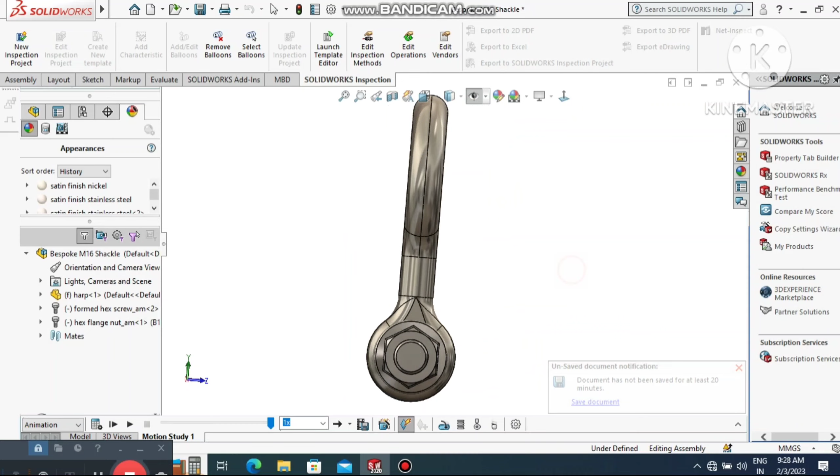So guys, today we are going to create a shackle design in SolidWorks. Let's see how we create the M16 shackle in SolidWorks. I hope you will enjoy this tutorial. Look how we create this part, and later we assemble this part in SolidWorks.

Now here we can zoom out this shackle. Look how we create this part in SolidWorks. In this video we will learn how to use revolve features, dome features, revolve cut and many more. So here we just create this part. Go to the file, select new, and here we select part.

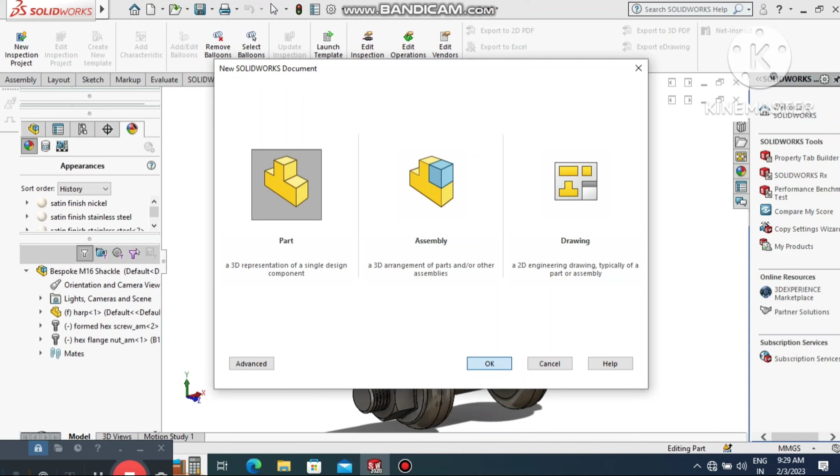Now here we change the background to plain white, and here we select the front plane, right click, sketch, and here we create two circles. Go to the center point and create two circles here.

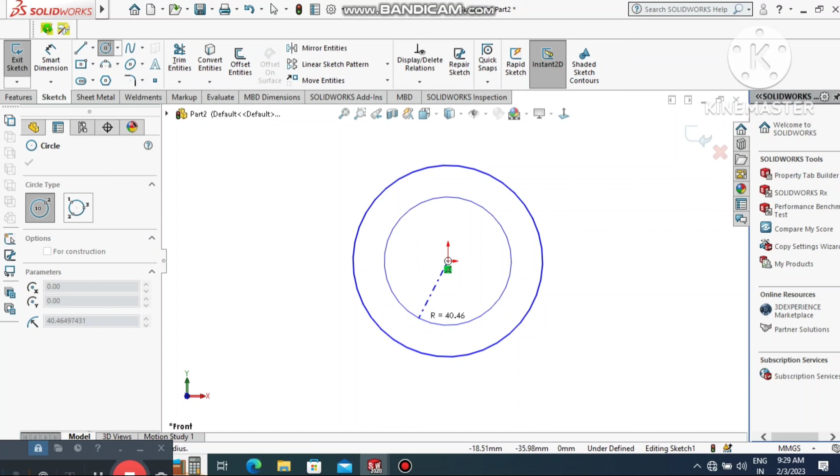Now go to the smart dimension and select this circle and make it 82 diameter, and select the second circle and make it 50 diameter.

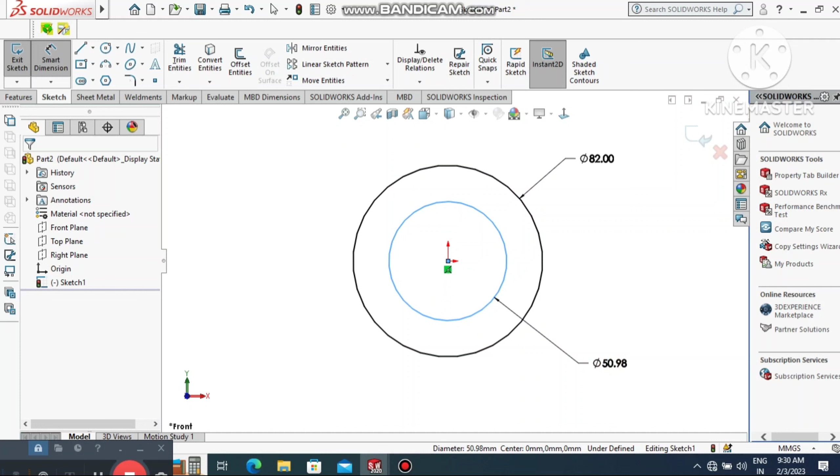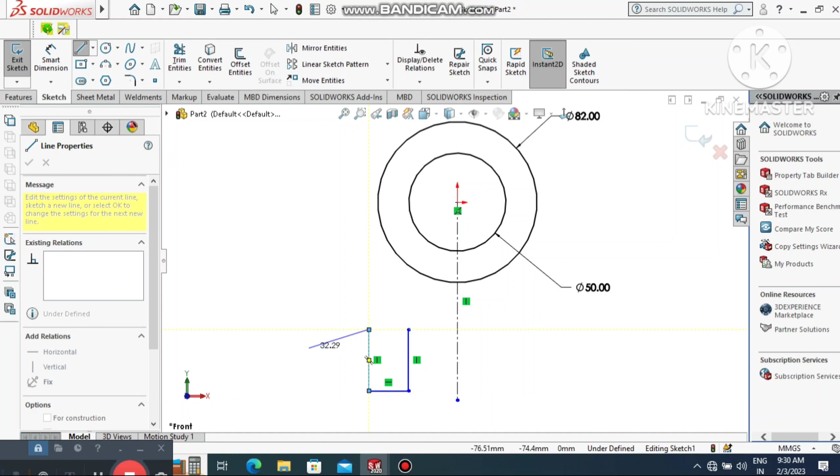Now here we create a center line from this origin point. Make sure it is vertical to this center point. Again we go to the line and here we just create one line. Now select this one and create it up to here.

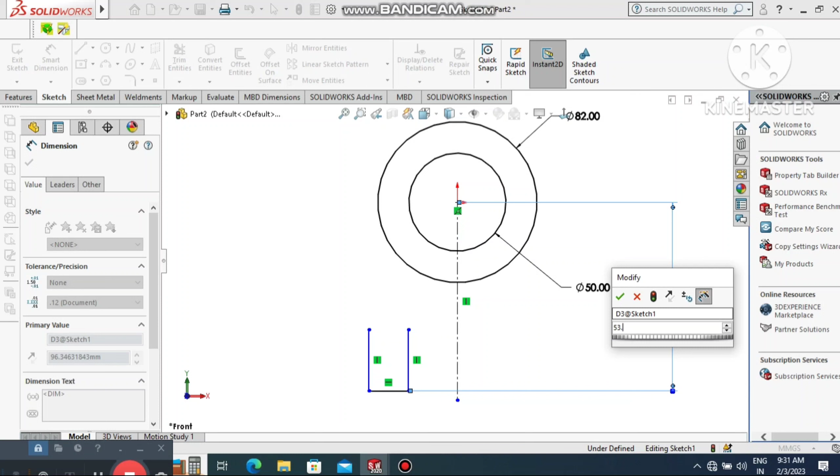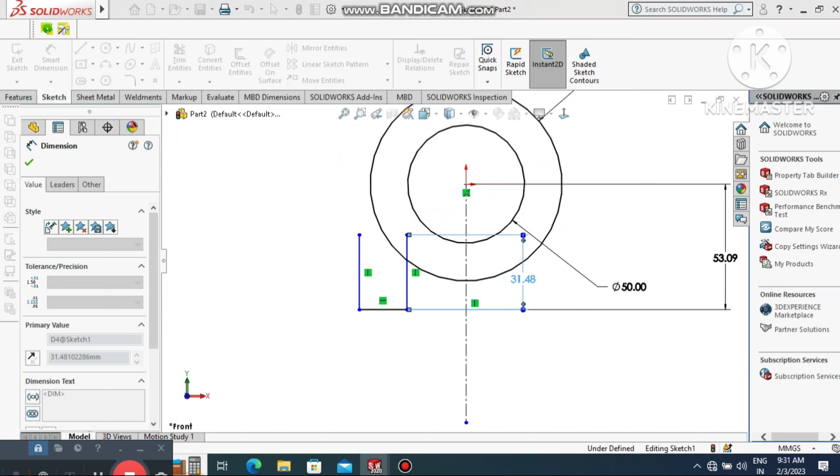Now go to the smart dimension and we select this center point of this line and this line, and here we make the gap between both lines 53.09 mm. Now again go to the smart dimension and here we select this line and make this line 19.03 mm. Now again select this one and make it also 19.03 mm.

Now here we define this line, the bottom line. Again go to the smart dimension, select this line and make it a 16 mm gap. Now again we make this gap between this center line and this line. So here we keep the gap at 13.70 mm. Now here we just select and create this line.

Now here it's time to create an arc. We are better to select 3-point arc to create this one. First we create a center line up to here. Now here we select 3-point arc and select this point and select this circle and make the arc up to here. Select.

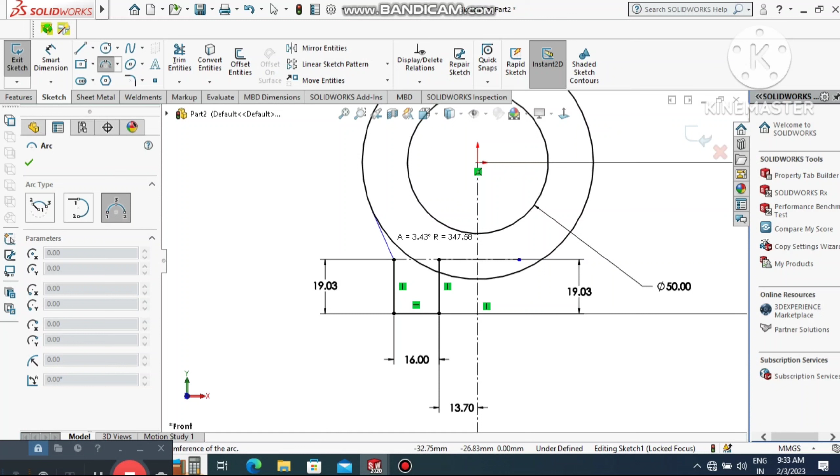Now again go to the 3-point arc and just undo this. Again select 3-point arc and select this point and this circle, and here we create. So select it and make it just inside, so the arc will be created.

Now again select center line, and here we just create a center line for the arc point, coincident relation. First we create the center line, so go to the center line and select this and create one center line up to here. Now go to the smart dimension, select this origin point, make it collinear. Now go to the smart dimension and select this line and make it 34.60 mm.

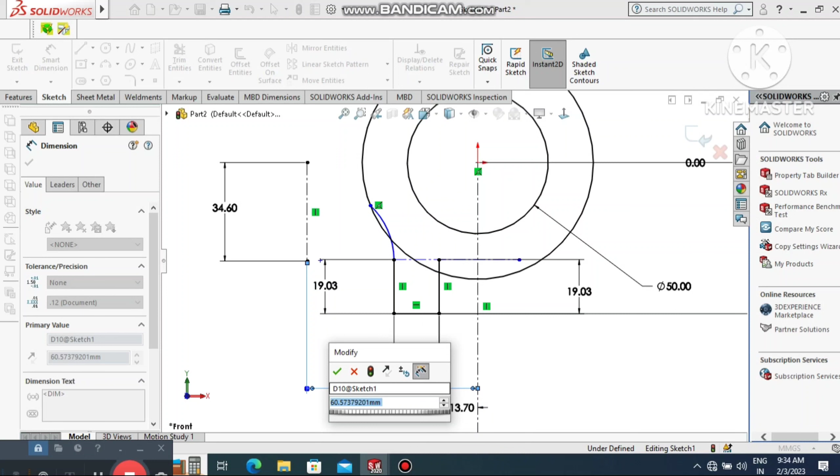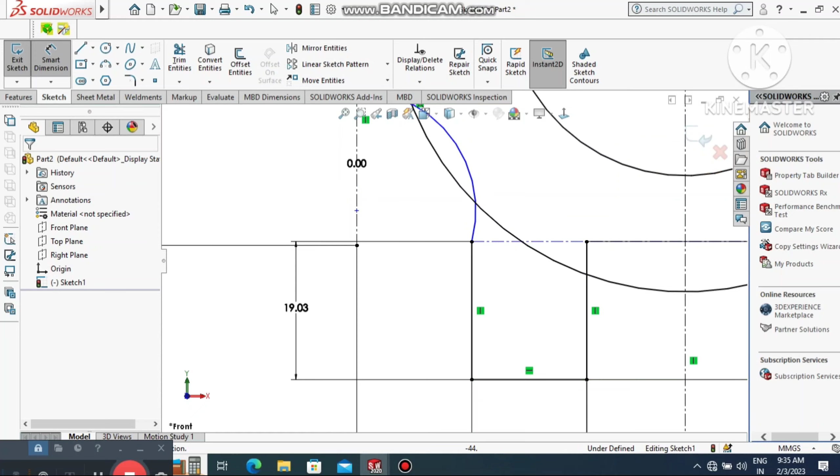Now select this center line and this line, and here we give the gap between both lines - make the line distance 45.70 mm. Now here we select the arc point and this point and make it merge or coincident at this point. Now go to the smart dimension and make the radius 16, so make it 16.

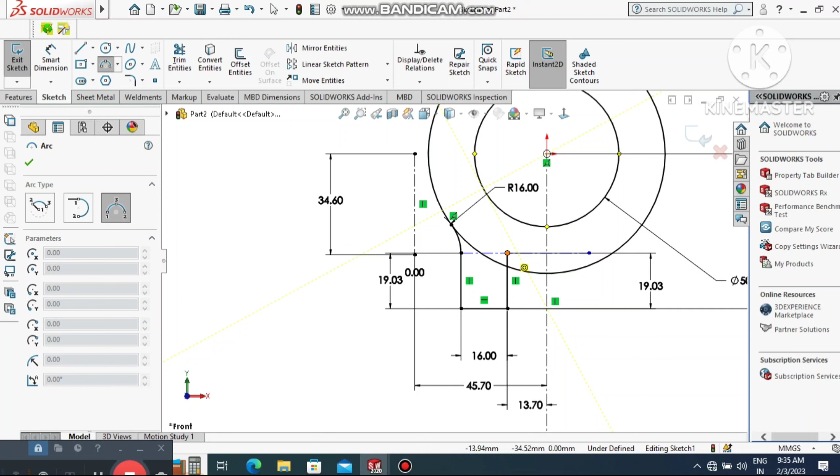So again we create one more arc. Go to the 3-point arc, select this point and this circle point and create one more arc. So we just select this one and select this point, and now here we just make it inside, so select here and make it up to here.

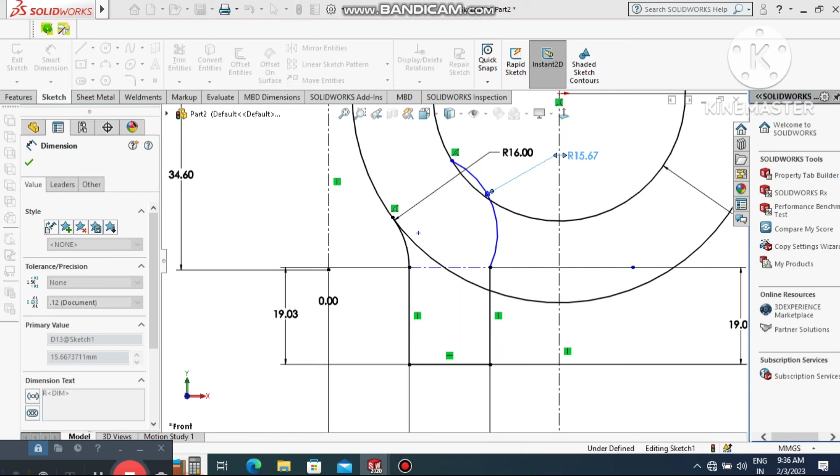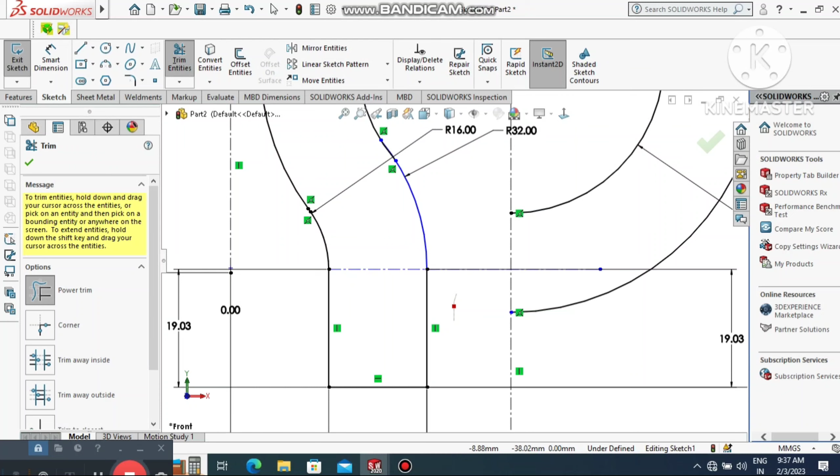Now here we select this one and make it 32 radius, so make it 32. Now here we trim this circular part, so again we make the mirror to this. First we trim this part, so just trim it and remove this part. Here we just created the arc, so there is no need for extra part, so select and trim. Go to the trim command and here we select power trim and trim this one.

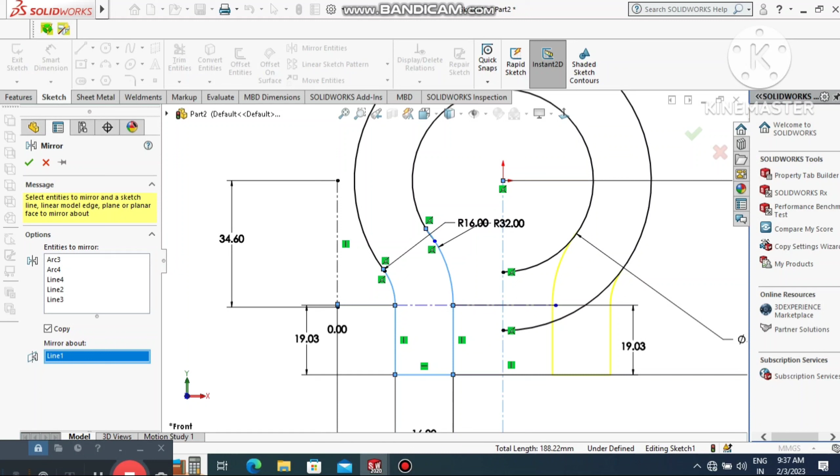Now here we just mirror this sketch, so go to the mirror command, now select this arc and this line also and make the mirror about this center line, so here we create it. Now here we just trim this part sketch, so go to trim and sketch this one, trim this sketch. Now here we create the sketch.

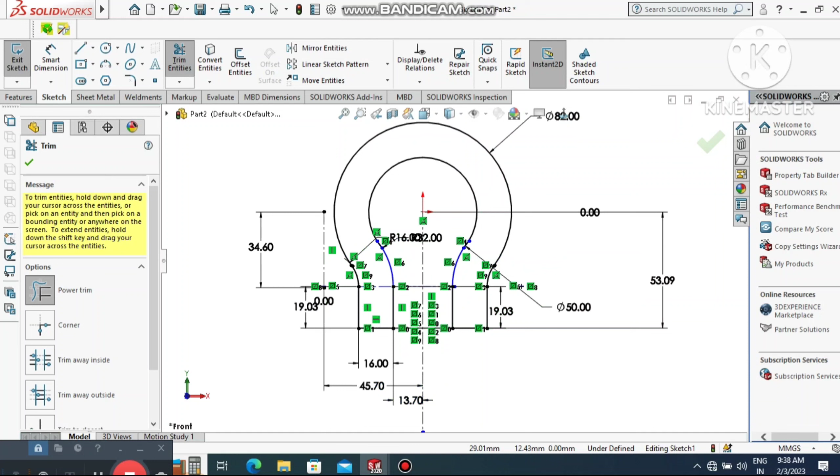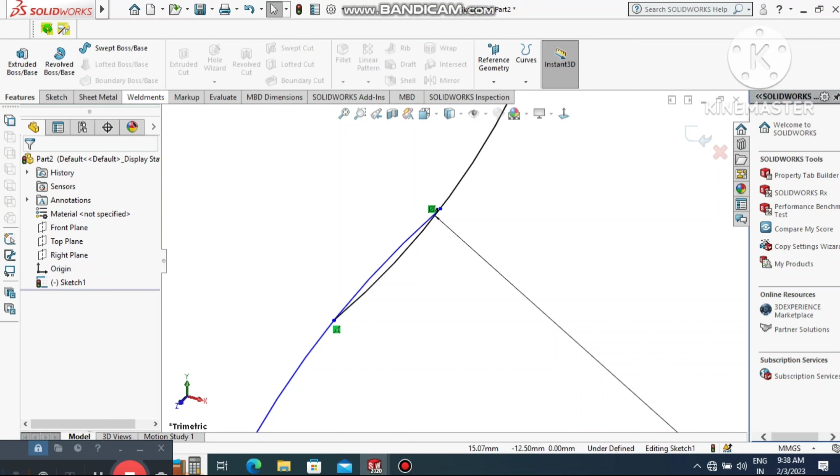Now here we make the extrude of this sketch, so go to features, select extruded boss base. Now here we forgot to trim this sketch, so again go to the sketch, now select trim, and here we trim this extra sketch which is disturbing the boss extrude.

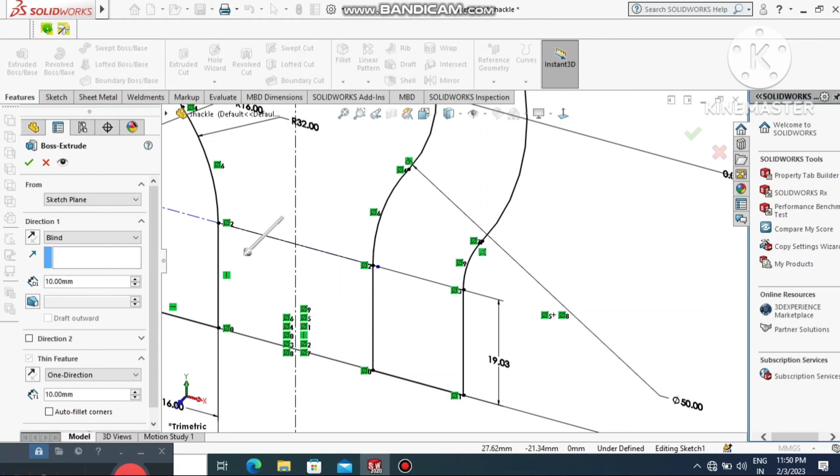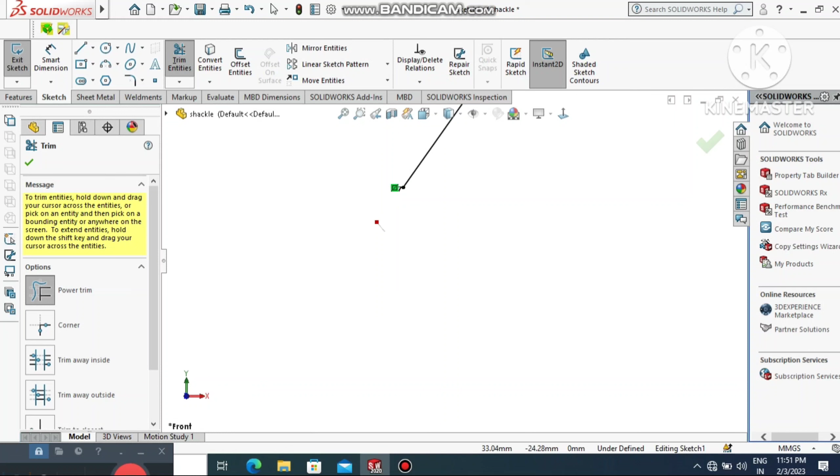Now here we check, and here we keep the relation. Now here we just trim this extra part sketch. So select. Now again this one, and make the relation coincident - sorry, not coincident, we make the relation tangent.

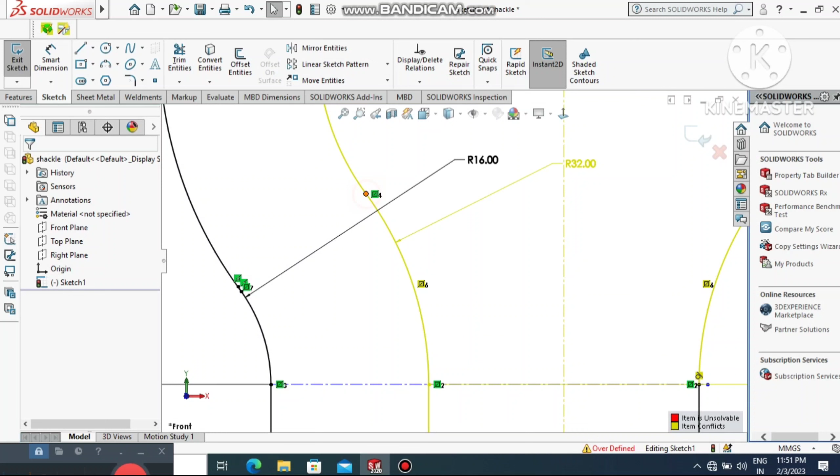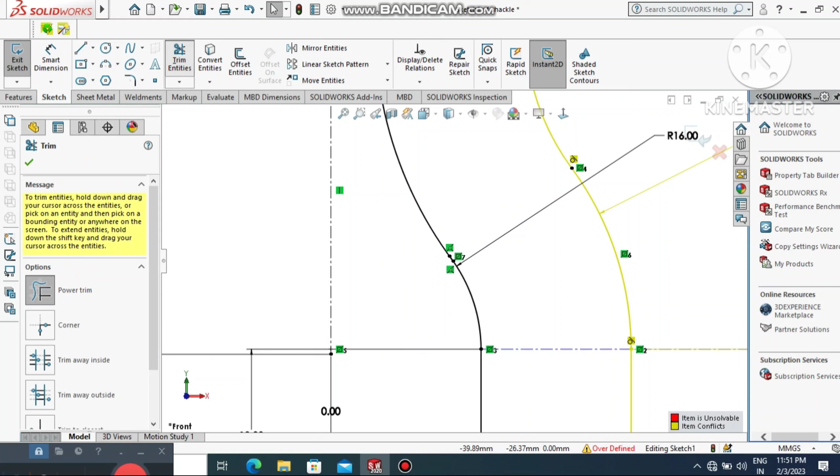Now here we select and make the relation tangent. Select this one and make it also a tangent relation. Now here go to the trim and trim it also.

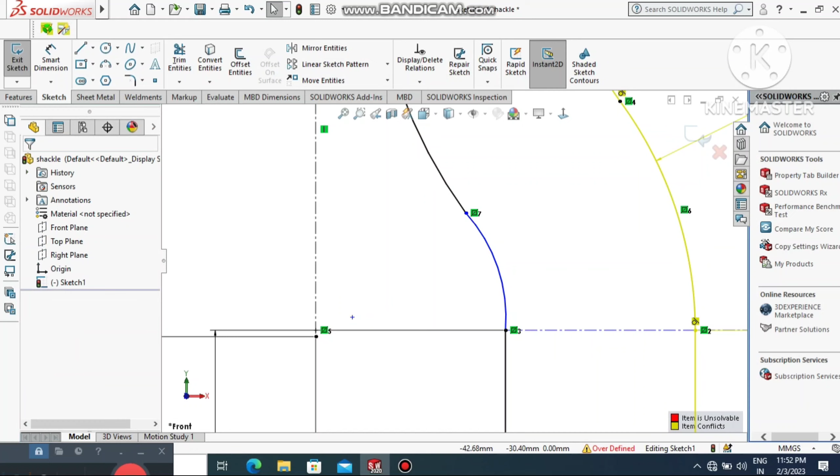So again here we create an arc. Go to the 3-point arc, select it, and now we create an arc from this point to this point and just make it inside this arc. Now here we also create the arc. Go to the 3-point arc, select this point and this point. Now we make the arc inside.

Now here it's time to make the dimension. Go to the smart dimension, select this arc and make this arc 16 radius. So make it 16 radius.

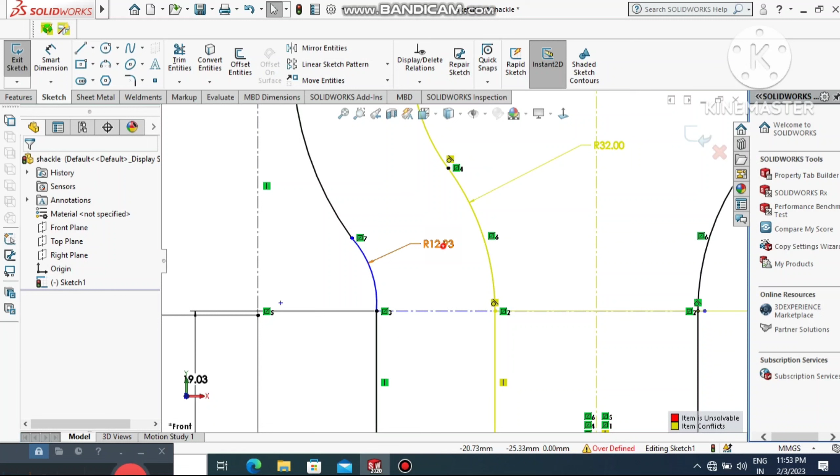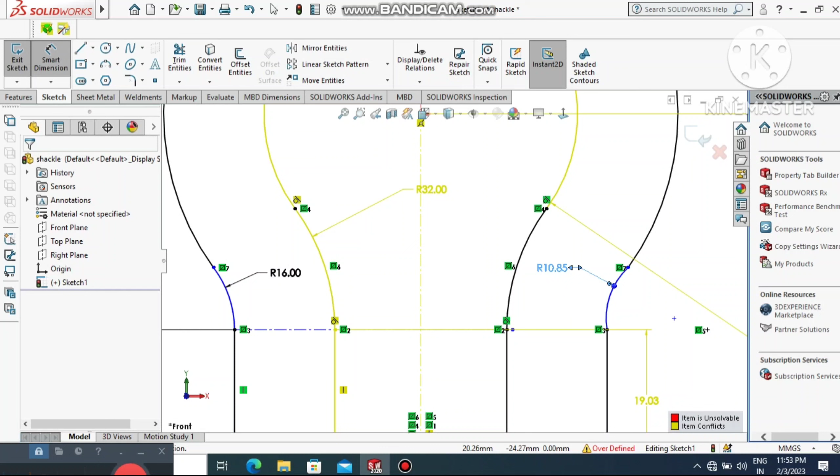Select and make it 16 radius. Okay, now again we select this arc and make it also 16 radius.

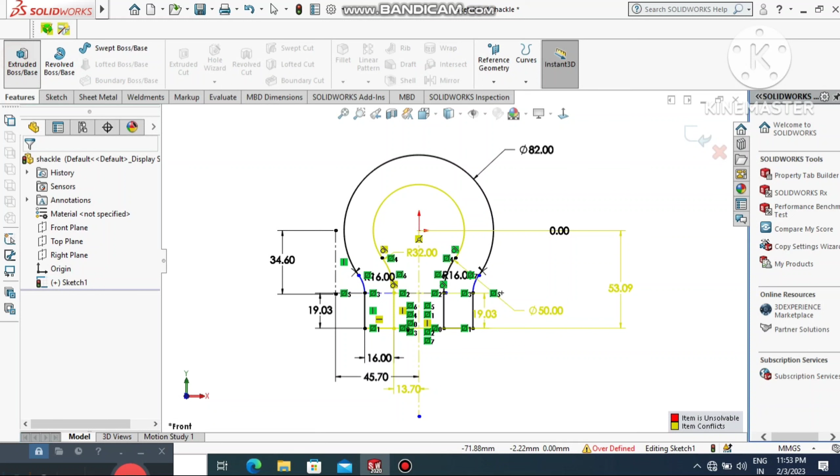Now it's time to extrude this sketch. Go to the features, select extruded boss base, and make the extrude 16 mm from the mid plane. So make it 16, and select the condition mid plane.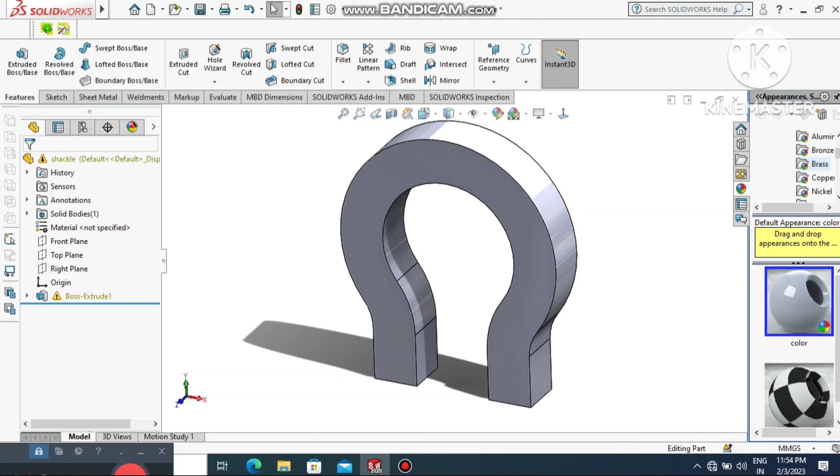Okay, now here we make the fillet to all this side, 8 mm fillet. So first we apply the material. Go to the design library, select material, and here we select nickel, and here we select brushed nickel, so it looks better.

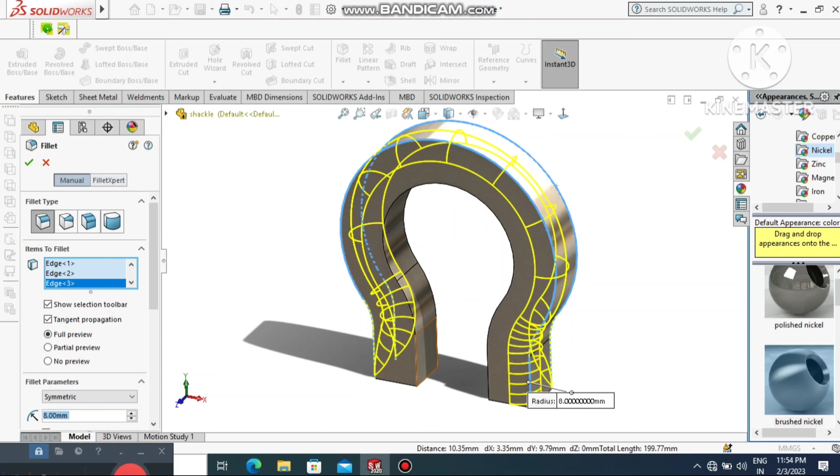Okay, now go to the fillet, select this edge, and here we keep the fillet 8 mm. Select this one and this one. Okay, so here we keep the fillet 8 mm all this side.

Now here we select the front plane, right click, sketch normal, and here we create center line. So first we create the center line up to here. Now we select this line and create up to here. Okay, and just join this line.

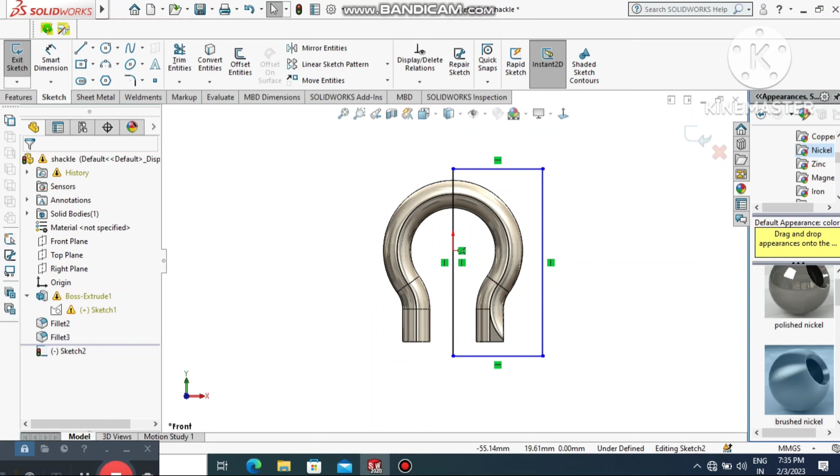Here we extruded cut this part, so here we delete this part and create further design, and later we make the mirror of this body. So first we delete this, trim this part.

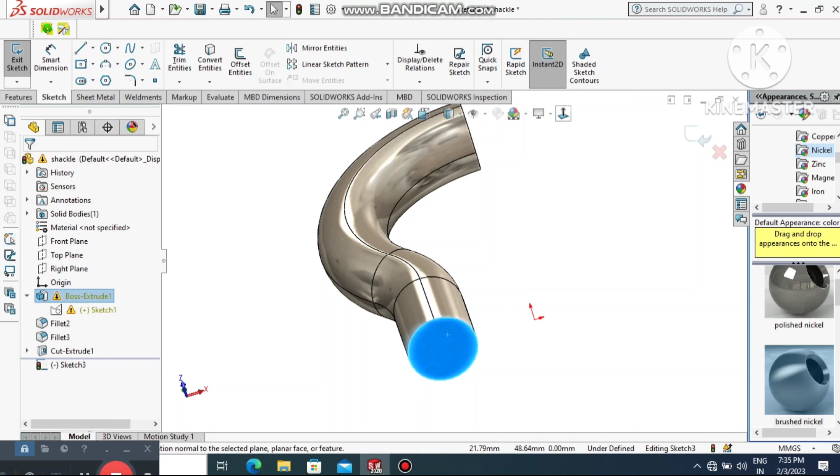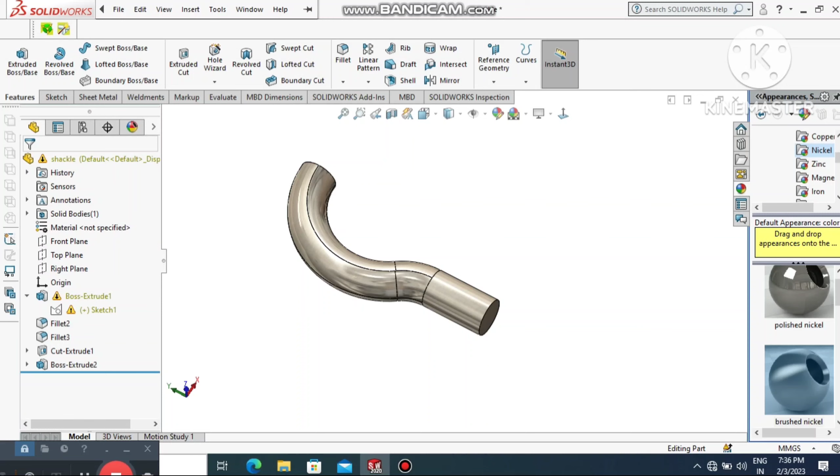Okay, now here we select this face, right click, sketch normal, and here we make it convert entities. So go to the convert entities, now select this face. Okay, now it's time to extrude this sketch. Go to the extruded boss base, and here we make the extrude 8 only, and make the merge result. So here we create one single body, so it's better to make the parameter merge result.

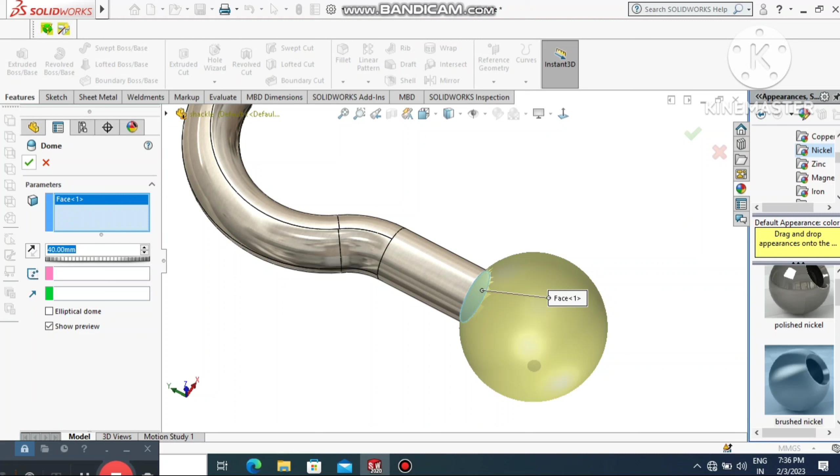Okay, now here it's time to create the dome feature. Go to insert and select dome feature. Now here we select this face, so we need to make the dome of 40. Okay, now here we create dome feature.

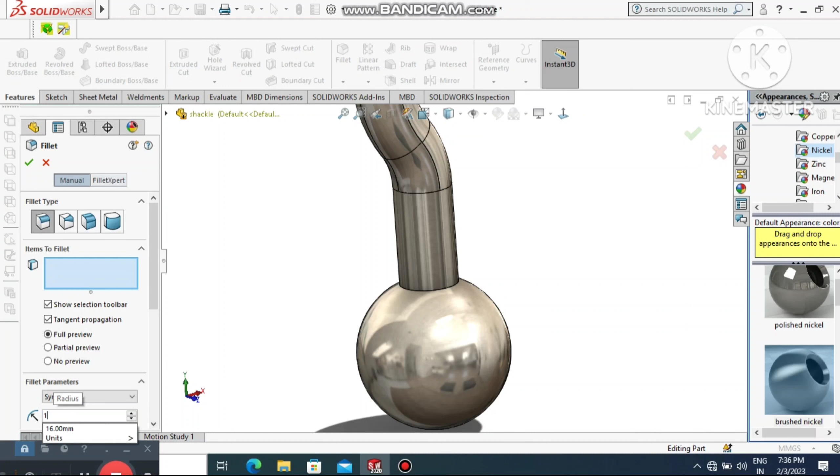Now here we make the fillet to this edge. Go to the fillet command, and here we make the fillet of 8. So make it fillet, sorry, not 8, we create fillet 16. Okay.

Now again we create cut out some portion. Select this front plane, right click, sketch normal, and here first we create center line. Go to the center line and create center line up to here. Okay, now again we select the line. Go to the line, and here we create line from this point. So here we just create one line here. Now again select this line and create line from here.

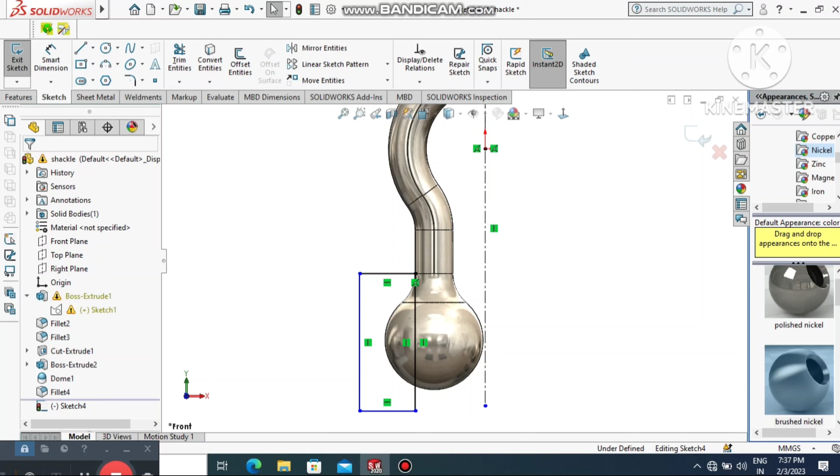Here we just need to remove, cut out some portion for bolting. So here we just create a sketch. Again we select this line and create the line from this point, up to here. Now select this one, and just join this part.

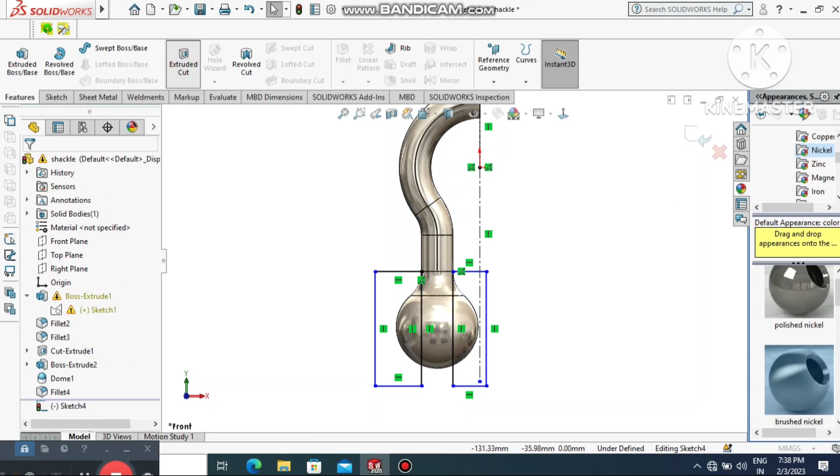Okay, now here we cut this sketch throughout this body. Go to the extruded cut, and here we cut this portion. So we select and make the direction through all, both sides. Okay, so here, look, we cut this part body.

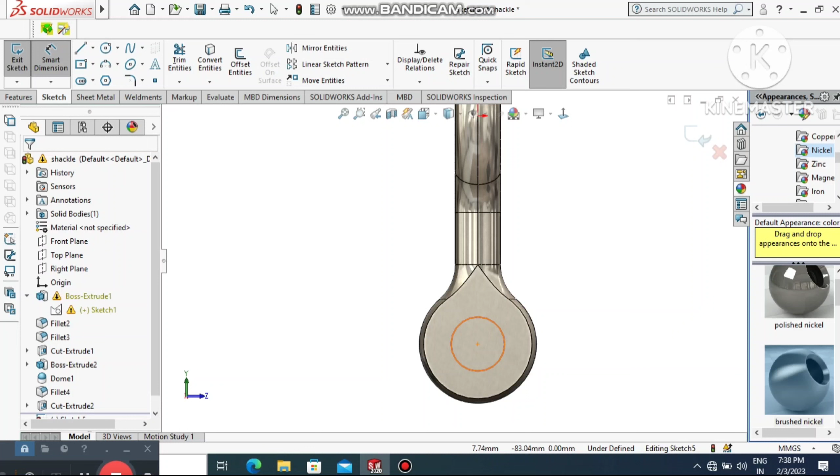Now again select this face, right click, sketch normal, and here it's time to create the circle cutout. So here we just find the center line. Go to the circle, select this point and create the circle up to here. Now select this circle and make it 16.3 diameter.

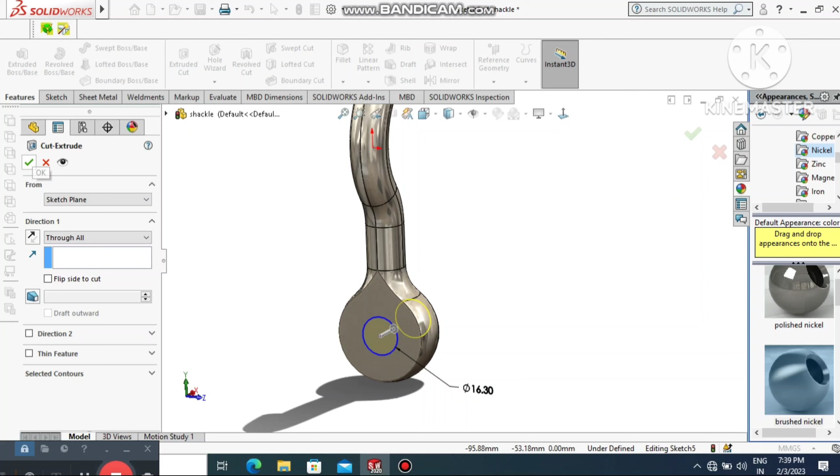Okay, now here we just cut this circular cutout. Go to the feature, select extruded cut and make the direction through all. Okay, now here we cut this part.

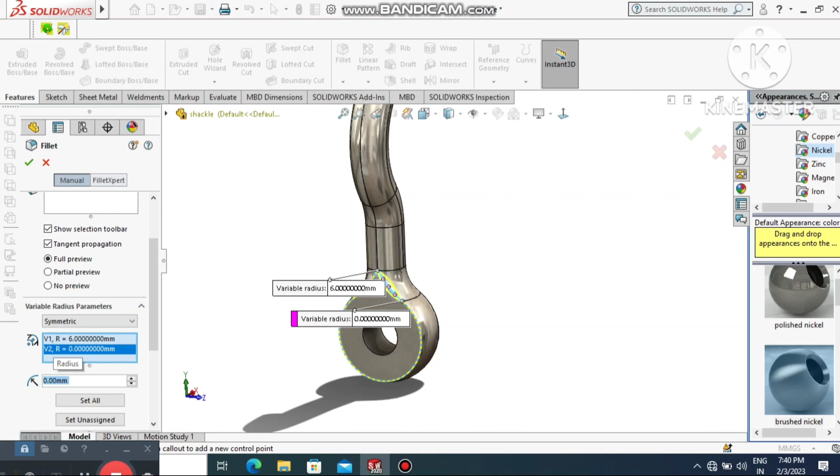Now here we just add the fillet. Go to the fillet, select this edge. So here we better create a variable fillet. Select this edge and we create V1, make it 6, and V2 create 0, so make the V2 radius 0.

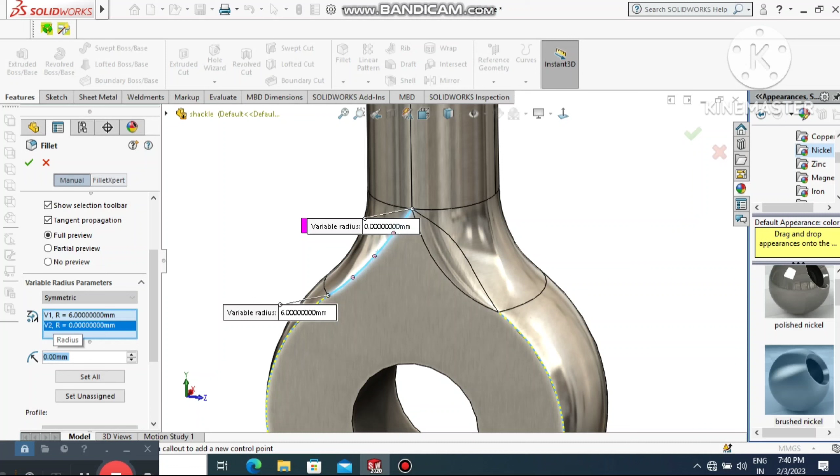So again we just make the fillet to this. Go to the fillet and select this edge, and here we make the fillet, create up to here, 6. So it will not work, so it's better to create a normal fillet. Again go to the fillet, select this edge, and here we make the fillet of 4 radius.

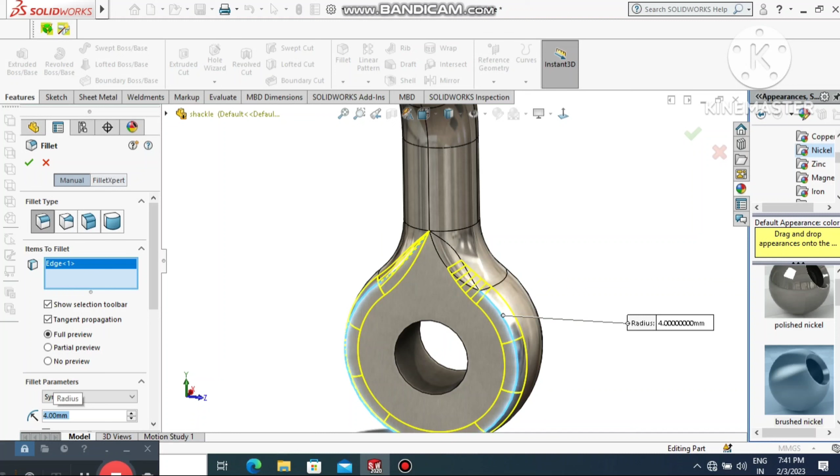Now here we just add the fillet to the other side. So again go to the fillet, and first we make the fillet of 2 mm inside this circle.

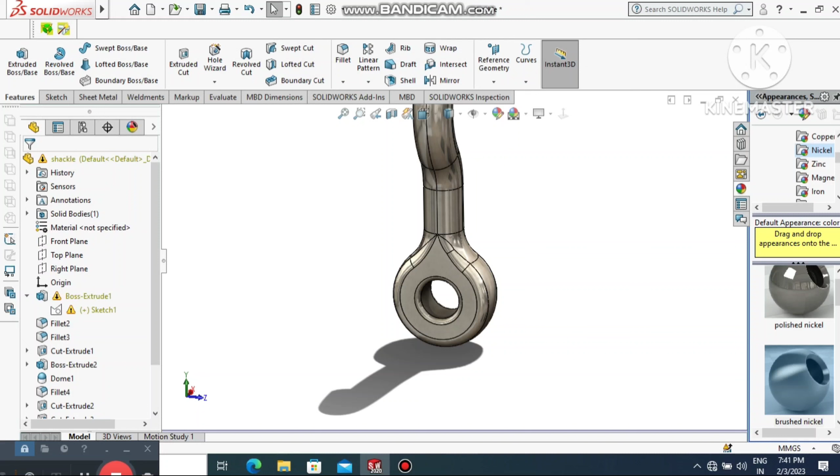Okay, now again rotate this model, and here we just apply the fillet. Go to the fillet command and select this edge, and here we create fillet 6.

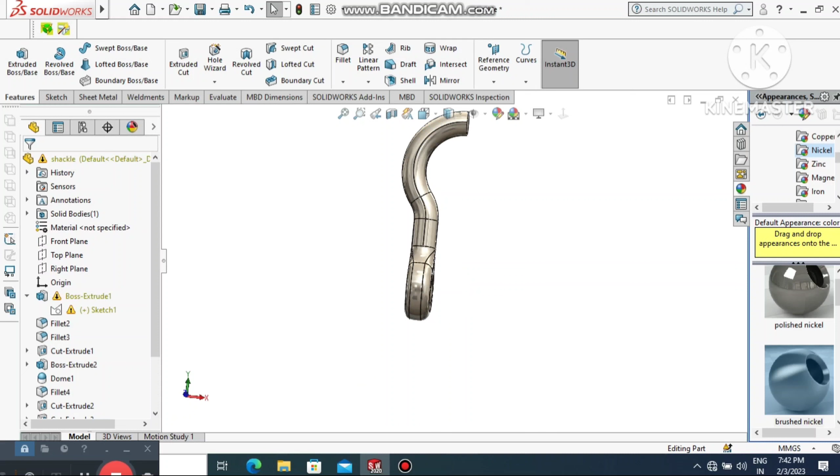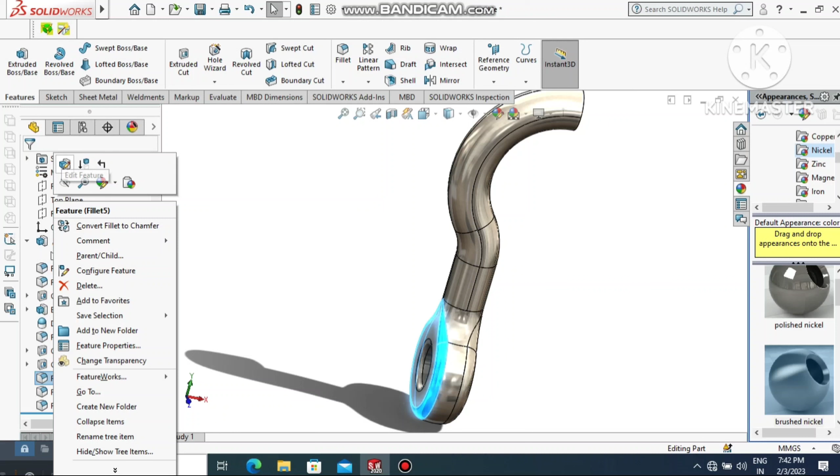So 6 mm is not required, so here we change into 4 mm. Again go to the edit feature, now we select this fillet and make it edit, so just check. So here we apply the 4 mm radius fillet, so we make the fillet 4 mm this side also.

Now again select this face, right click, sketch, and make it normal, and here we create convert entity. Select and select convert entity, so the sketch will be converted into a sketch. Now go to the boss extrude and make this extrude 7 mm only.

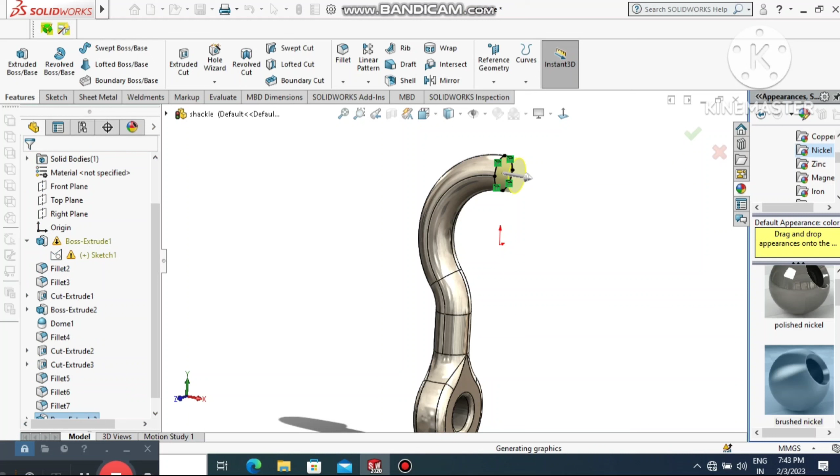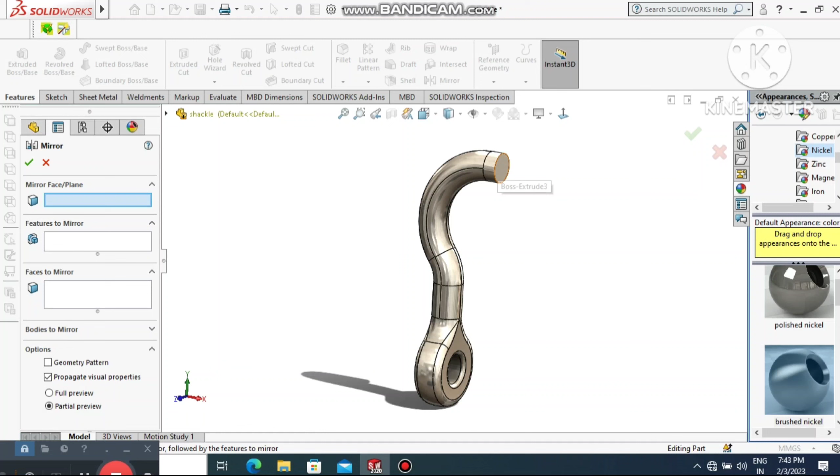Now it's time to make the mirror body. We create and check the merge result. So here we make the mirror body. Go to the mirror, and here we select mirror face plane. We just select this face where we keep the mirror. Select this one, and here we select body to mirror. Simply select this body. So here look how we mirror this part.

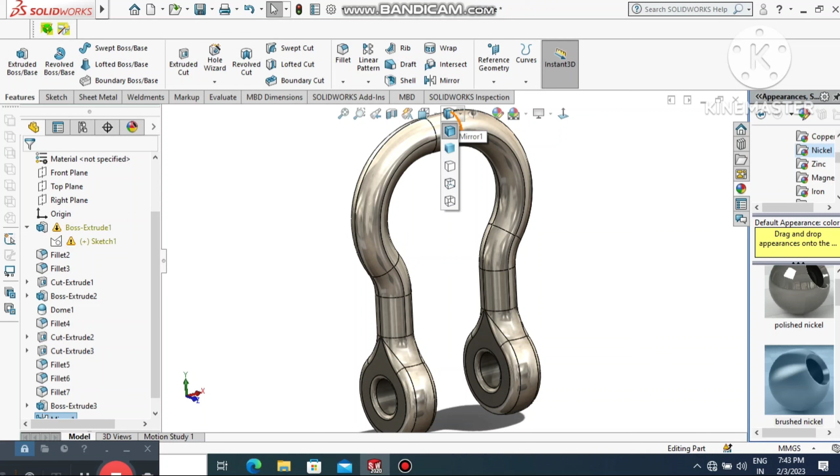So look how we create this 3D shackle in SolidWorks.

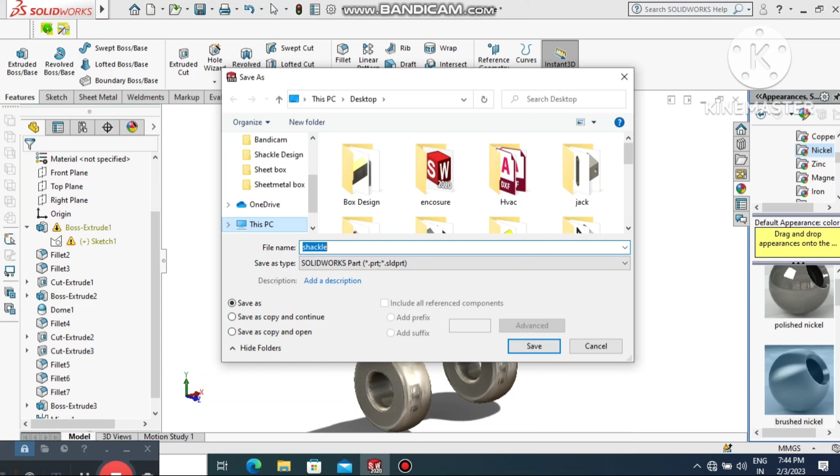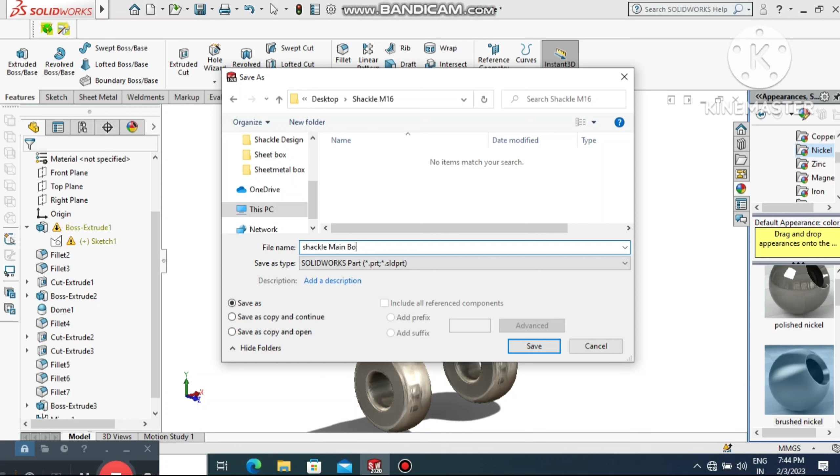So here we create this part, and now we just select and save it to our destination. Go to the file, now save it and give the destination to your folder. Select new folder, and here name it Shackle M16. Now select this one and save it as shackle, shackle main body. Here we create and save it to our destination.

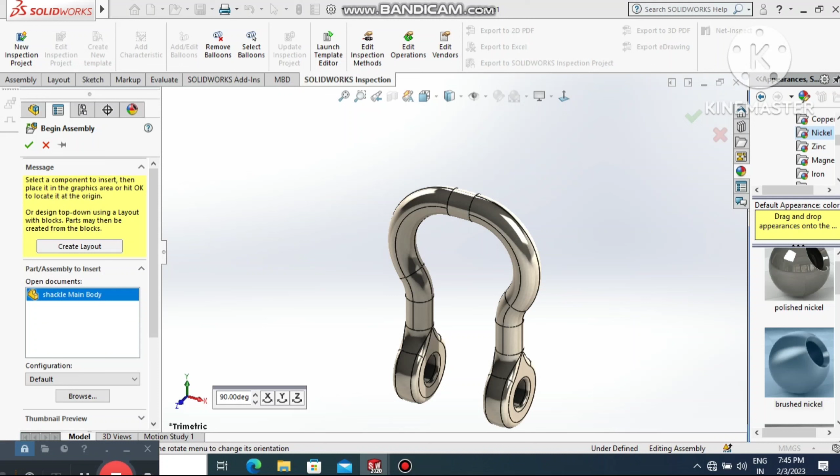Now here it's time to apply the nut and bolt to this body. Go to the assembly, select OK. Now we just import this body, so just insert. Now drag up to here and make the background plain white.

Now here we just see the view, now pan it here. Okay, now again go to the design library. Now select add in now. Here we just drag and select ANSI metric.

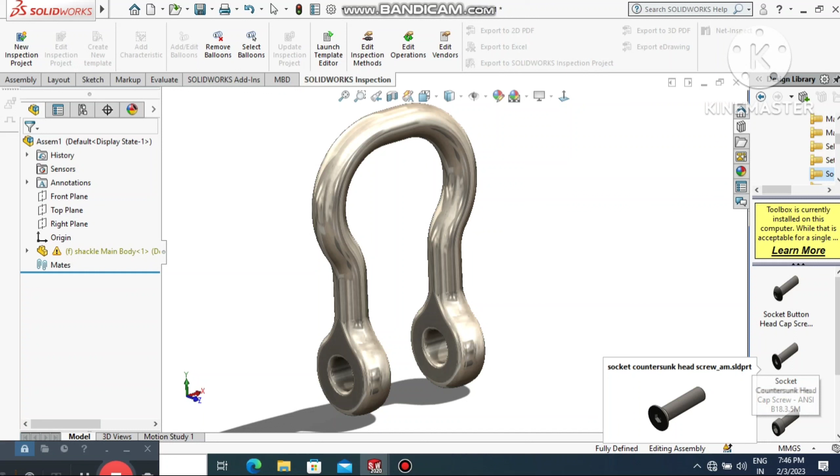Now here we select this bolt, so here we go to the socket head bolt. Not socket, we just remove this one. Now here we need hex head bolt, so select and simply select this bolt and drag up to here. It will select the dimension, so here the size will be M16.

Now here we give the length, so go to the length and make the length 90 mm. Since 110 mm is too long, make it 90.

Now here it will ask for thread design, so we will select simplified. Not simplified, we need schematic, so it will show the thread automatically. Now here we remove this one.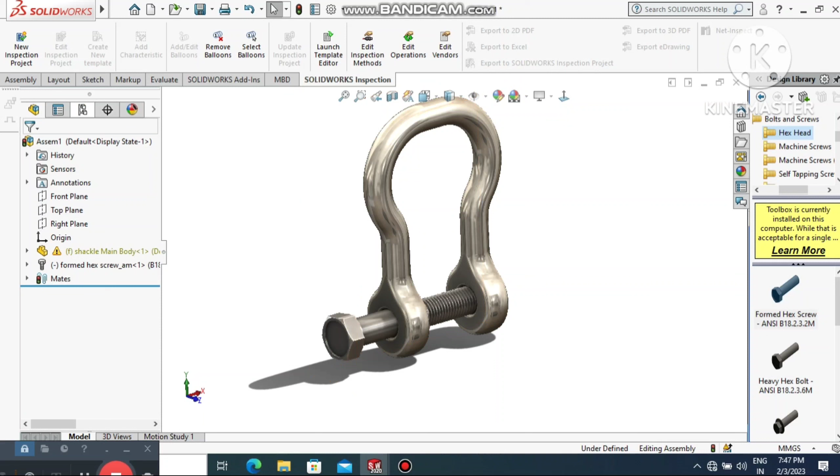Now again we make the relation mate position, so we just select this bolt, right click, select this one and this one, so here we make the relation coincident.

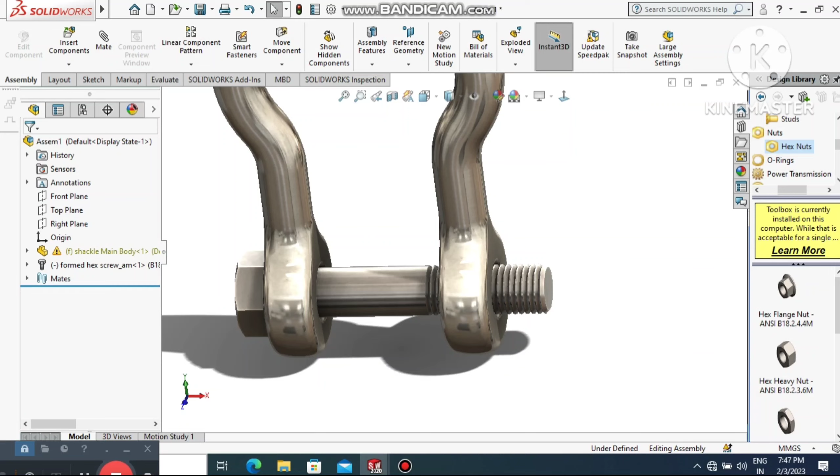Now again we apply the nut, so again go to the design library. Now go back this side and here we select nut and select hex nut. Now simply select this nut and drag up to here.

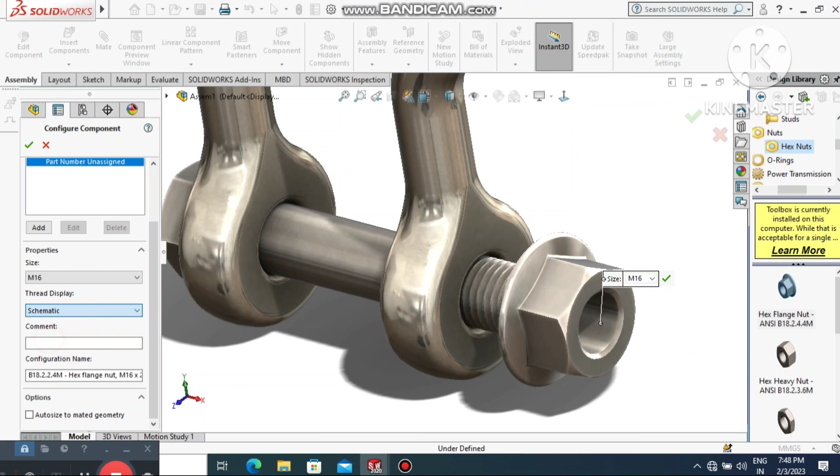Now here we select and make the thread schematic, so the thread will be created automatically. So it's better to look how we show this threaded view of this nut and bolt.

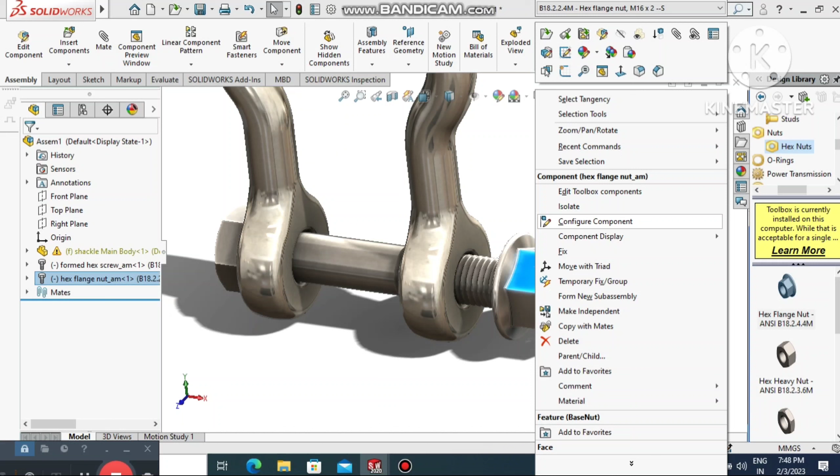Here we select this nut, right click and see the view mate, select it and here we delete this coincident mate, so just select and delete it. Now exit this, so untick this.

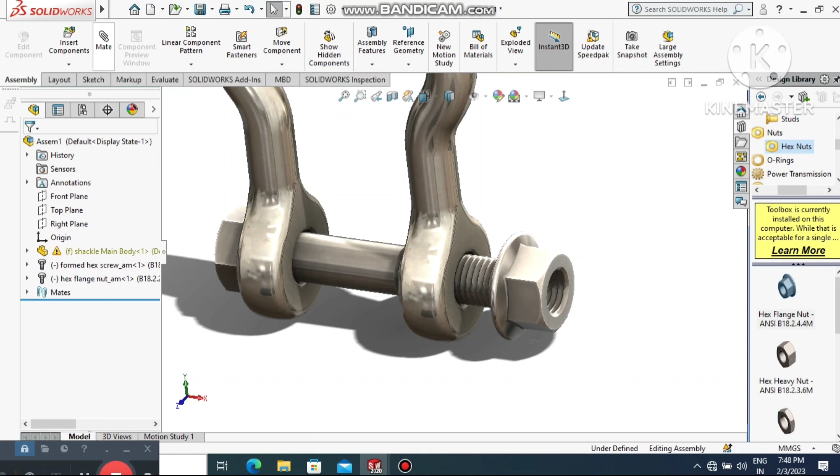So here we just mate, so it comes inside, so here we go to the mate, select this face and this face, so it comes to this position.

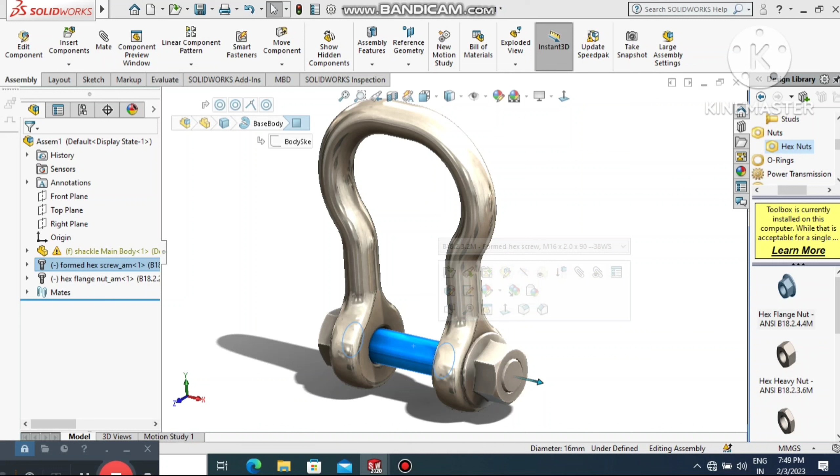Here we adjust and increase the length of this bolt, so it's better to double click on this bolt. Now exit this mate first, then double click on this bolt and here it will show the arrow, so here we can increase or decrease length. We just make it 110, sorry, not 100 mm length.

So here look how we create the shackle and make the assembly of this shackle, nut and bolt. So look at this one, now here we just create and zoom out, so look how we design in SolidWorks.

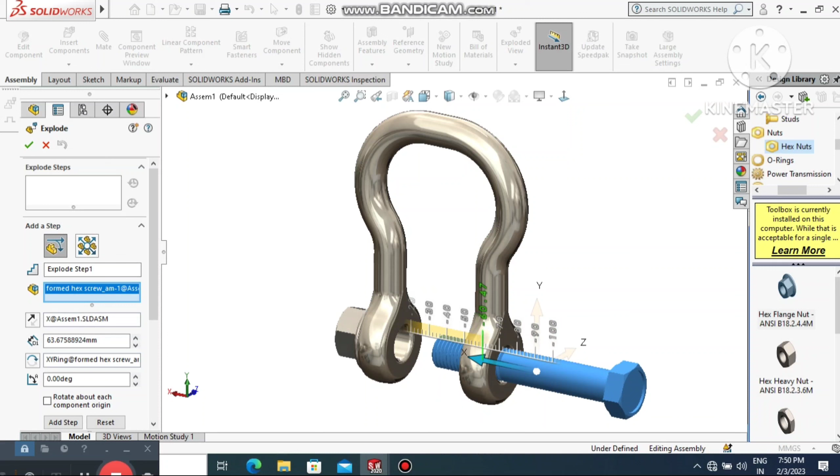So here we create exploded view, so select this bolt and just drag. Again go to the exploded view, select this bolt and drag outside. Now here we select the done feature.

Now you can select this dot and just drag to the opposite side. And here we just make the exploded view line, so here it will show you how any part assembles and in which direction. Select this route line, now select this line, so here it will show how any assembly joints, how we fit any assembly parts.

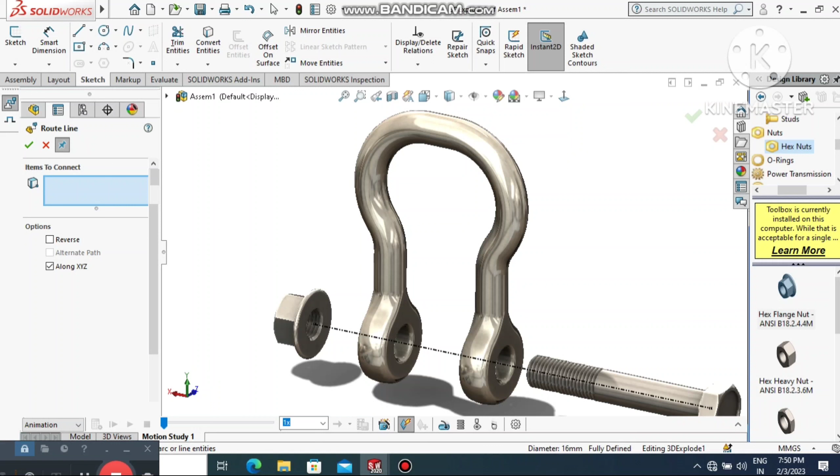So okay, now here we create the animation. Go to the animation, now here we select rotate, and again we select this animation wizard and select the explode, and here we explode from start time of 10 and make the duration 8 seconds.

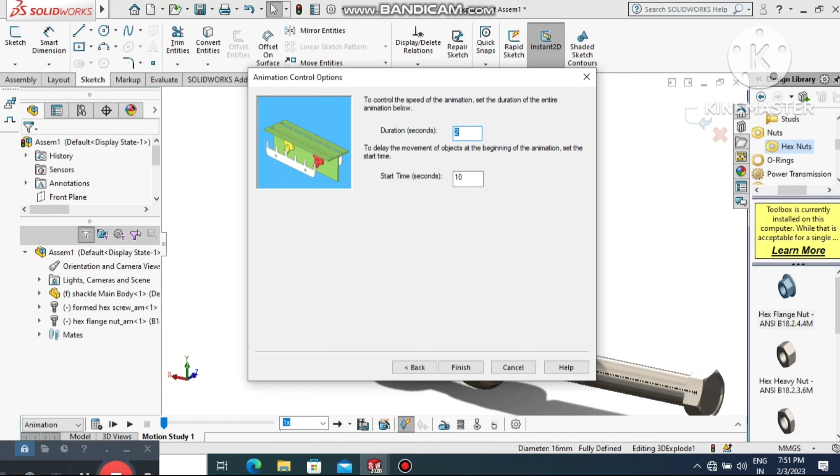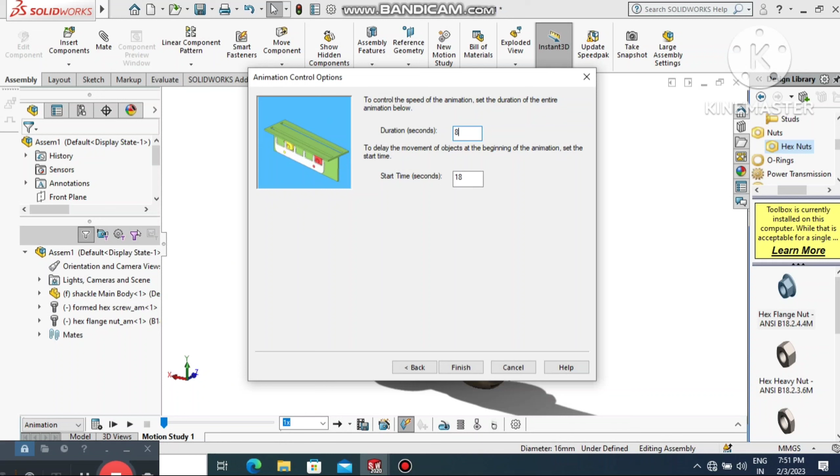Again go to the animation view wizard and here we select collapse. Select the next and here select the start time, so make it 18 seconds, and here we need 8 seconds of collapse.

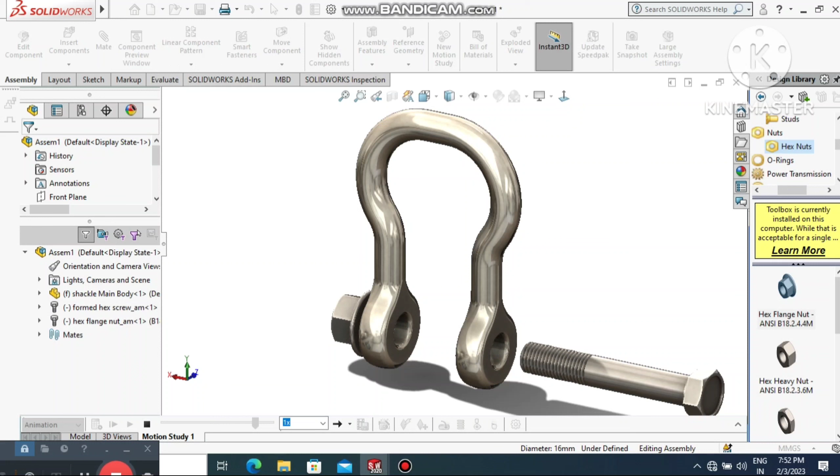So here we create the animation, look how we create animation of any assembly part. Look how we do this and create in SolidWorks, so it will be exploded from its position, and just come to their original position, so it will collapse.

So look how we create shackle design in SolidWorks, and later we assemble nut and bolt in SolidWorks.